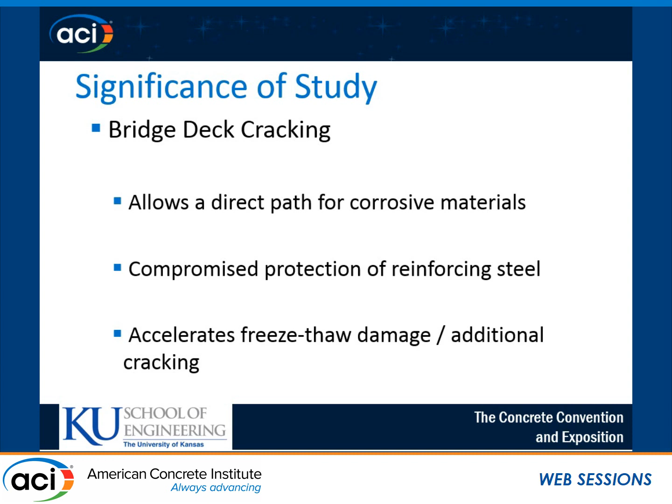The main culprits of cracking that we deal with in our research occur in both the plastic and hardened state of concrete. So we have plastic shrinkage and settlement in the plastic state, and after the concrete hardens, we deal with drying and thermal mechanisms.

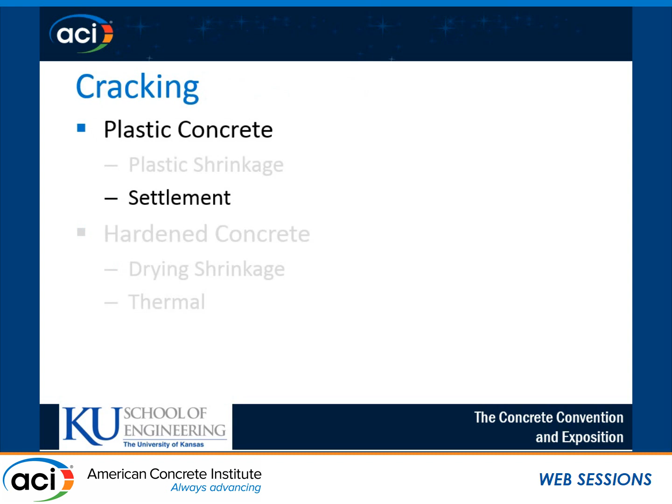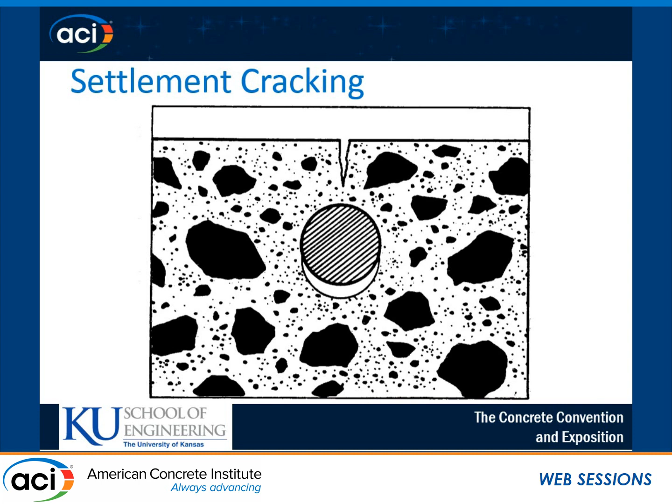The mechanism of settlement cracking is that the solid particles in the mixture settle down to the bottom, while bleed water rises to the top. As that concrete hardens, you have local tensile stresses that develop at the top, making you more prone to cracking directly over those bars. Not a good thing.

So, factors that affect settlement cracking: there's a lot of previous research showing that increased slump for a given mixture can also increase settlement cracking. On the design side, we can help mitigate settlement cracking by increasing concrete cover and decreasing bar size, with detrimental effects occurring vice versa.

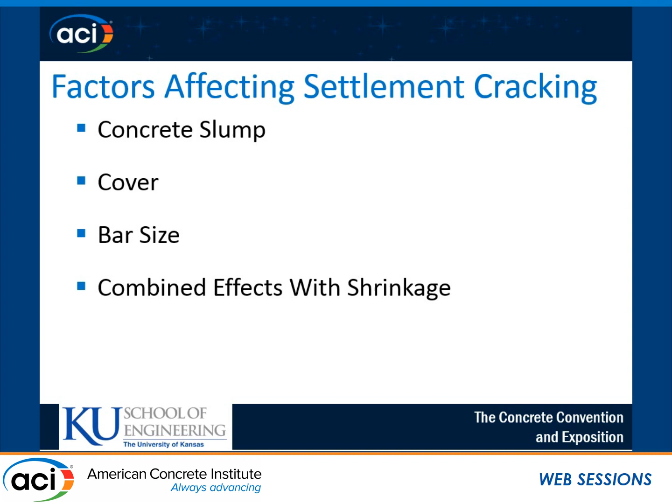Bigger bars mean a bigger surface area for that concrete to flow over, and less cover makes it more likely that concrete is going to crack. Finally, on the research side, we're tying settlement cracking in with shrinkage of concrete. Spoiler alert: the main point of this presentation is to show that many of the crack reduction technologies available to help reduce shrinkage also reduce settlement cracking.

Now getting into the laboratory side of things. This is a test, again, that we developed at KU to qualitatively compare different crack reduction technologies against a 100% Portland cement mixture in terms of settlement cracking performance.

The geometry of these specimens: we cast 12-inch by 12-inch by 8-inch deep beams with a single number 6 bar with 1 1/8 inch of cover over the top. After casting, we place these specimens in an environmentally controlled room for 1 day of curing, at 50% plus or minus 5% humidity, and 73 plus or minus 3 degrees Fahrenheit.

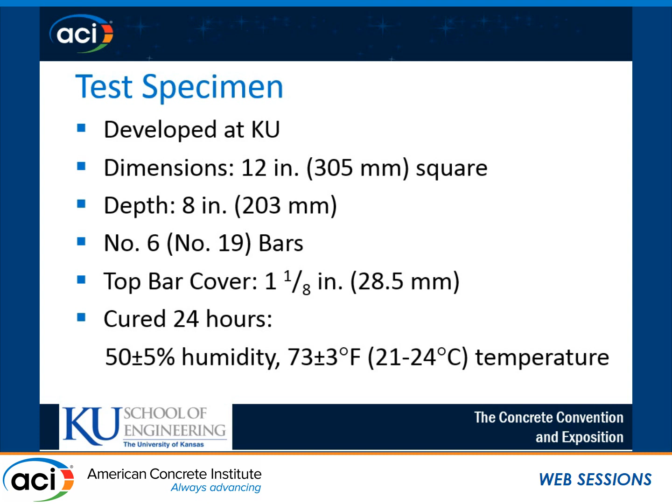Here we have a diagram of our settlement cracking specimens. To hold the rebar in place, we drill and tap both ends of the bar and hold it in place in the mold with a machine screw.

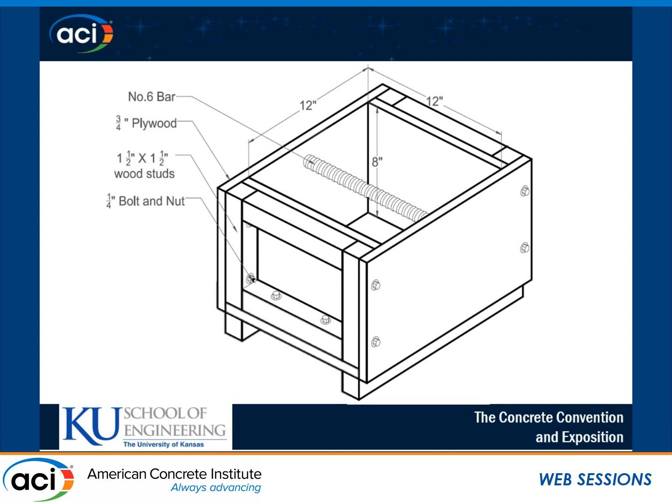For the properties we're looking for in our concrete mixes before casting specimens, we want an air content between 6.5% and 9.5%, concrete temperature between 71 and 75 degrees Fahrenheit, and our independent variable in these studies is slump. Most of our series vary the slump between 2 and 9 inches.

This gets into probably the most important part for maintaining control and getting good data: when we do a series, it's best to use a single operator for placing, finishing, curing, and doing the subsequent evaluation of each of these mixes.

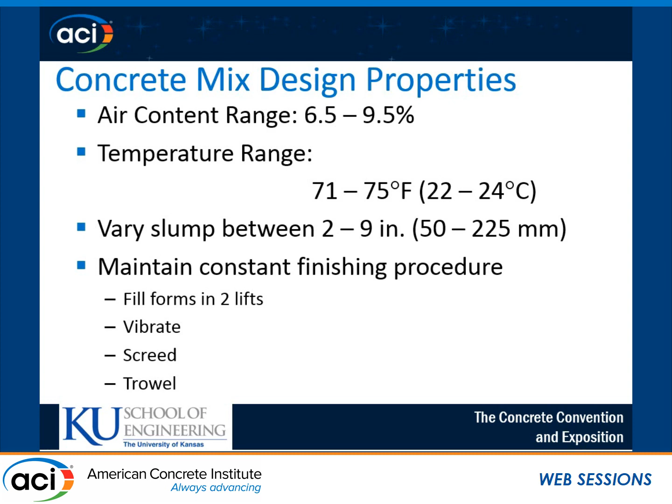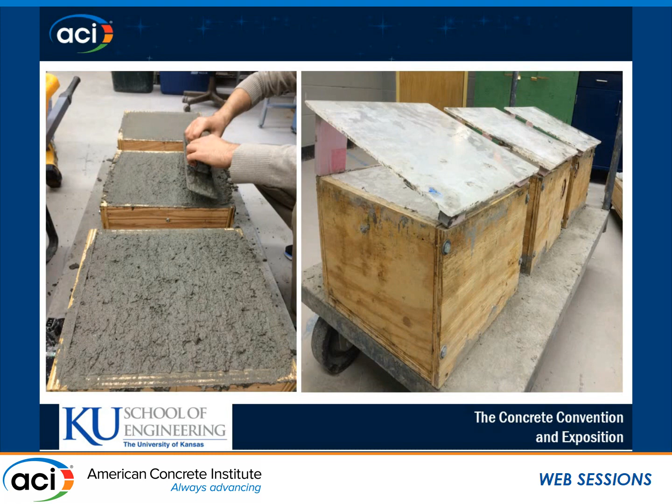The figure on the right is part of our curing regime, which was really important in the evolution of this test procedure. After finishing the surface of these specimens, we place a sloped piece of plexiglass over the top. This helps mitigate other factors that can come into play in the first 24 hours that can cause cracking, so we isolate settlement cracking by itself without drying shrinkage or other surface defect issues coming into play.

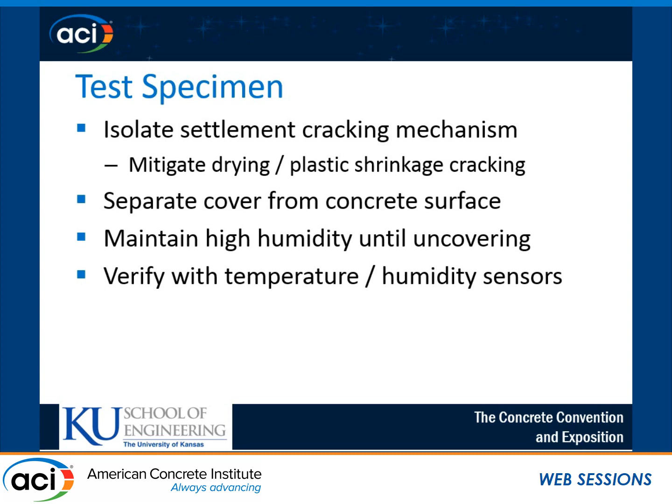We also want to maintain high humidity during curing, which we verify with temperature and humidity sensors placed on the forms, monitored throughout the curing period. After placing the sloped plexiglass on top of the forms, we seal those with a plastic sheet and seal that off with a rubber band.

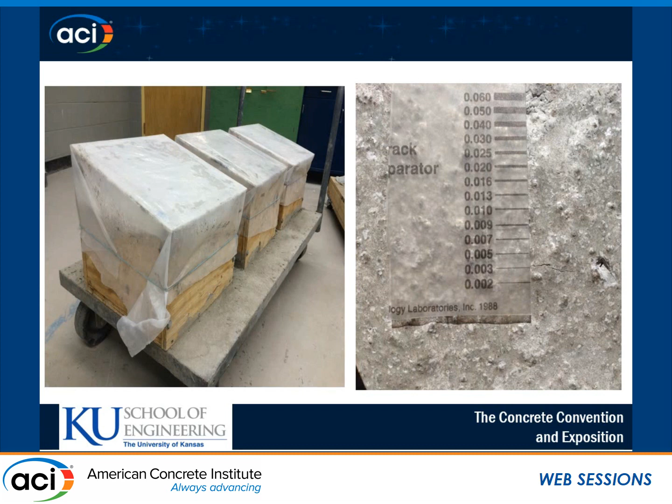Not very complicated. After 24 hours, we measure both the length and width of each resultant crack. Here's the finished product. It's also important to note that the only cracks we're actually counting are the ones that develop directly over the surface of that piece of rebar.

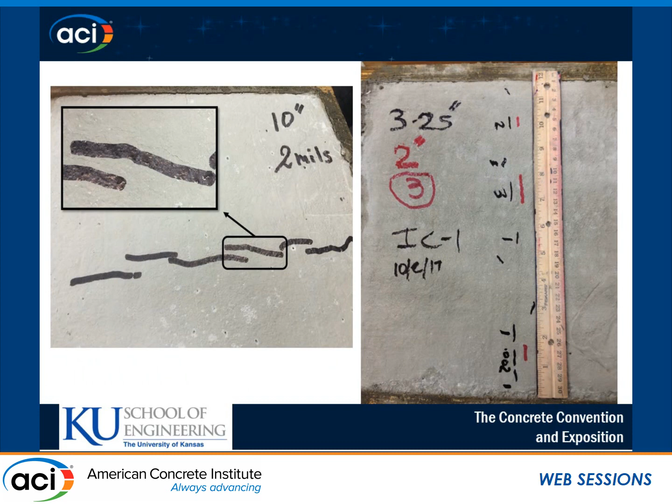Mixture proportions we kept constant for each series: a 0.45 water to cementitious materials ratio. We use 27% paste content, and for our 100% Portland mixes, which is our control series, that converts to 593 pounds of cement and 267 pounds of water.

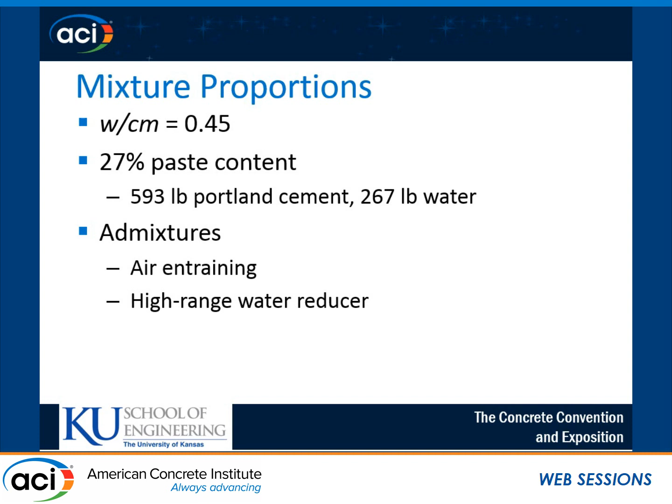To get our air correct, we use an air entraining admixture, and to vary the slump, we use a superplasticizer. With our control mix, along with others, we use KU Mix, a mix design optimization program. The aggregates we use are 2 gradations of granite, one with a 3/4 inch max size down to 1/2 inch, and the other 3/8 down to number 8.

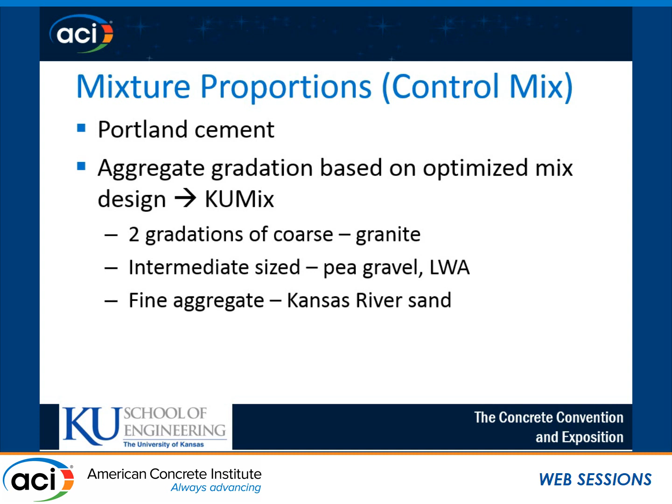We also use an intermediate size aggregate in the form of pea gravel. For mixtures where we want to incorporate internal curing, we use a pre-wetted pea gravel size lightweight aggregate, and Kansas River sand for our fine aggregate.

For our test program compared to our control mixes, we're looking at a partial replacement of cement with supplementary cementitious materials. Our binary mixes are 30% slag by volume, and our ternary mixes are 30% slag and 3% silica fume.

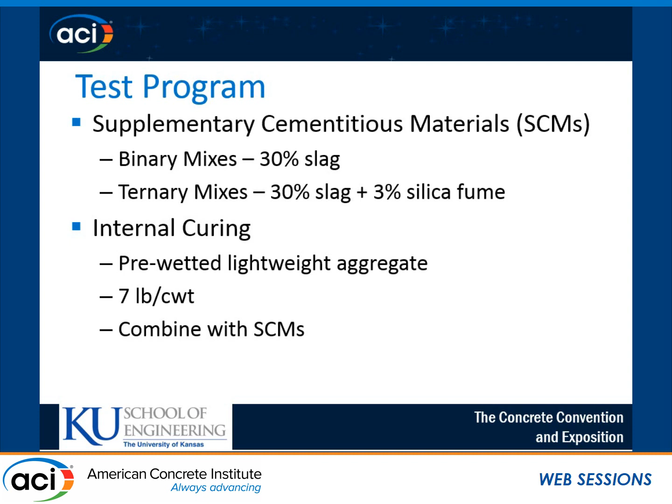We also introduced internal curing, again with a pre-wetted pea gravel size lightweight aggregate, proportioned to achieve 7 pounds per 100 pounds of cementitious material of internal curing water. We repeat those SCM mixes with internal curing to see if we can get a combined effect. And we do.

Additionally, other parameters we looked at were incorporating a viscosity-modifying admixture and a shrinkage-reducing admixture. We also looked at 3 different types of macrofibers and 1 type of microfiber for which we varied the dosage.

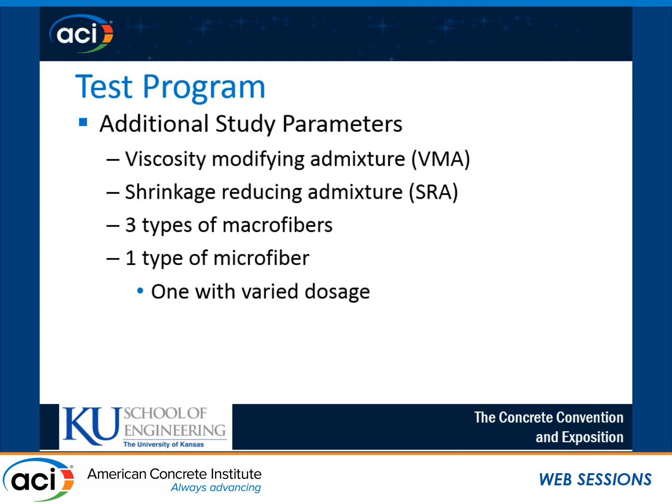Now getting into the results. Here's an example of one of our control series. For each of these graphs, we have slump on the x-axis and the ratio of crack length to bar length on the y-axis. So if each specimen in a single mixture had a crack 12 inches long over the entire length of the bar, that ratio would be 1.0.

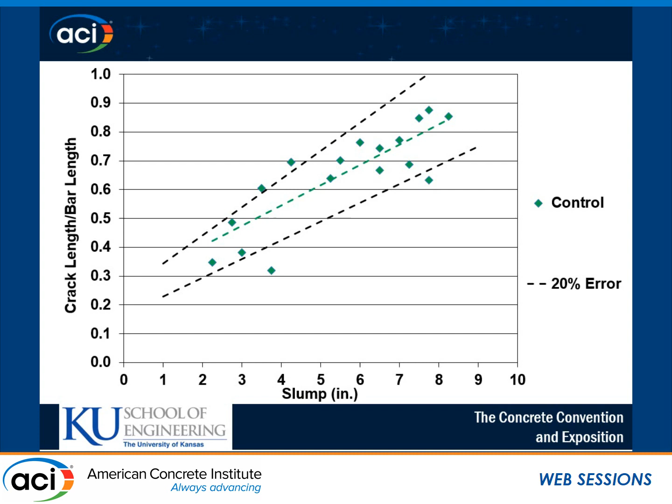Each data point here is the average of 3 specimens we do per mixture. This is important because we get a lot of scatter with these series, so we make sure we do enough mixtures to get a good trend line out of that.

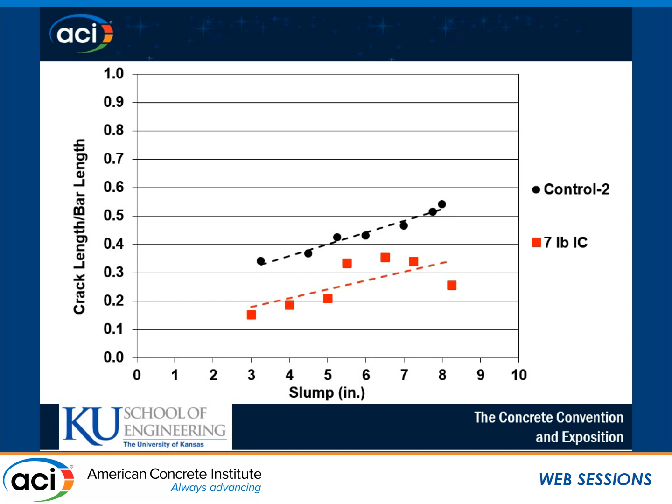Getting into our comparisons now, both of these mixes are 100% Portland cement, but the series in red has that partial replacement of lightweight aggregate pre-wetted to provide 7 pounds per hundredweight of IC water. For each slump we looked at, we saw a reduction in settlement cracking. The mechanism behind that is that the bleed water rising up in the system can be pulled out of those lightweight aggregate pores a lot easier than from the cement matrix, so the bleed water that comes out isn't being taken from the cement at all.

We see a similar trend with our binary mix. When we have our 30% slag mixture, we also see a reduction in settlement cracking. The mechanism behind that is that you're tying up more of that bleed water in the finer granules of that SCM.

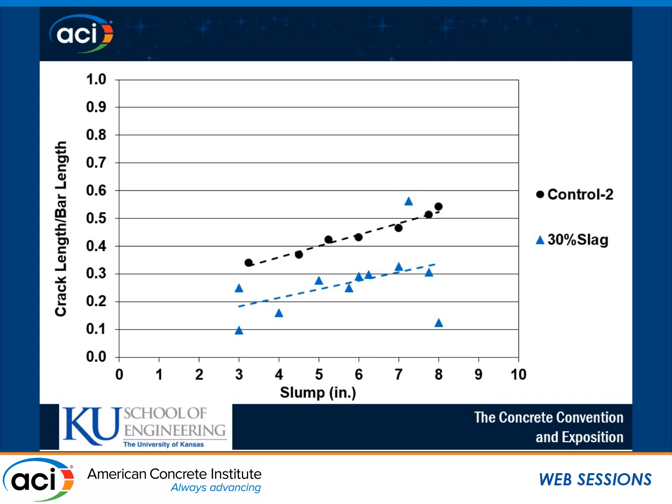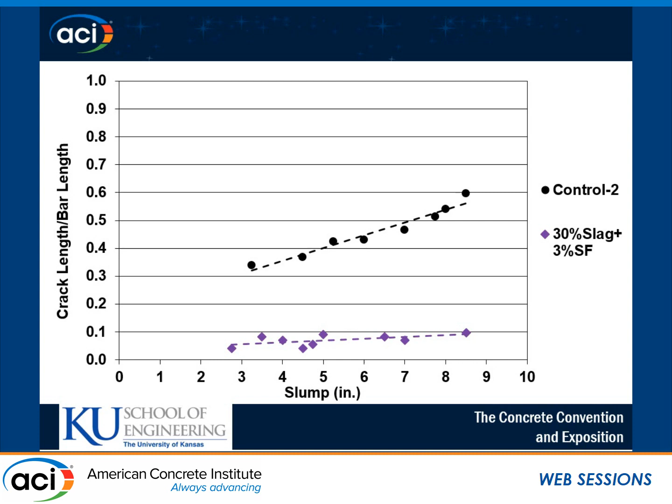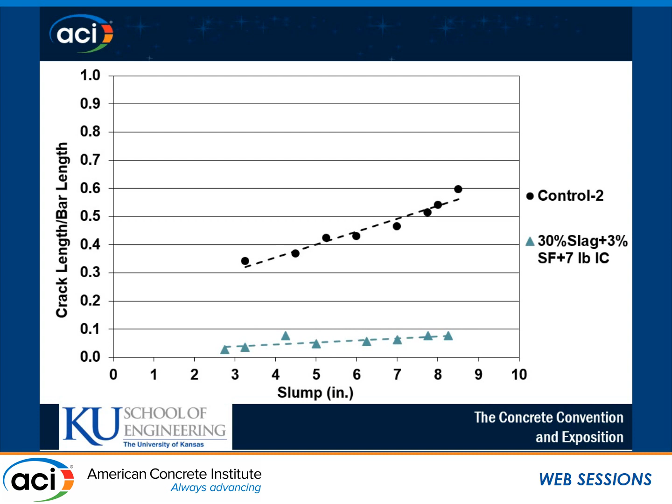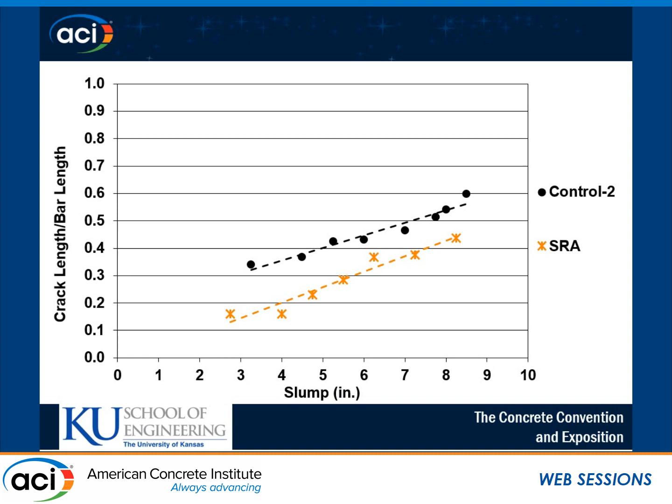And finally, when we add 7 pounds per hundredweight to our ternary mixture, we also have a very low resultant settlement cracking result. For that same control, when we dosed a shrinkage-reducing admixture at 2% of cementitious materials by weight, for 100% Portland cement, we also see a reduction in settlement cracking. This is likely due to, at early ages, SRAs causing swelling in the first 24 hours.

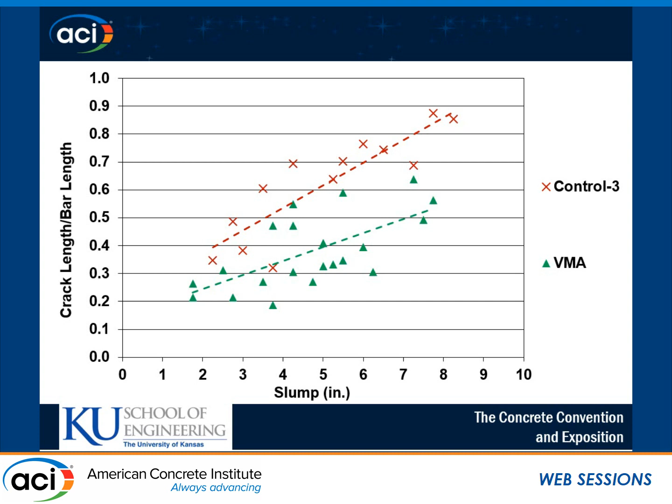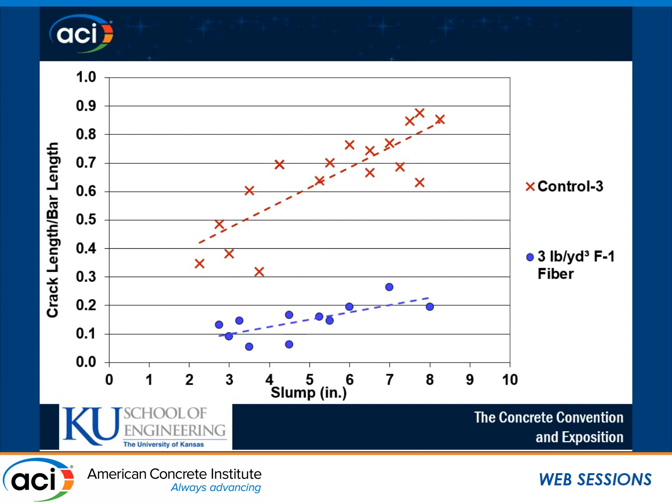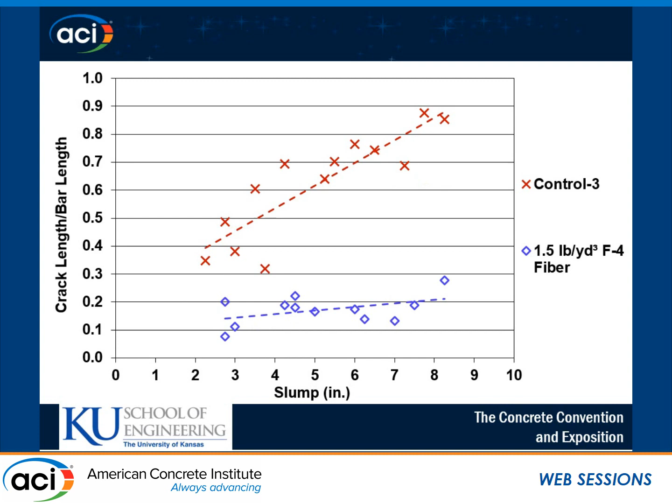Getting into our fibers, when we dosed 3 pounds per cubic yard with one of our macrofibers, for each given slump that we looked at, we had a reduction in settlement cracking. Very similar results when we used 1.5 pounds per yard of microfiber. When we group all of our fiber results together, we see a very tight spread of data for each type and each dosage. I'll point out that the 3 pounds and 1.5 pounds of microfiber per yard have almost the same result - the differences are not statistically significant.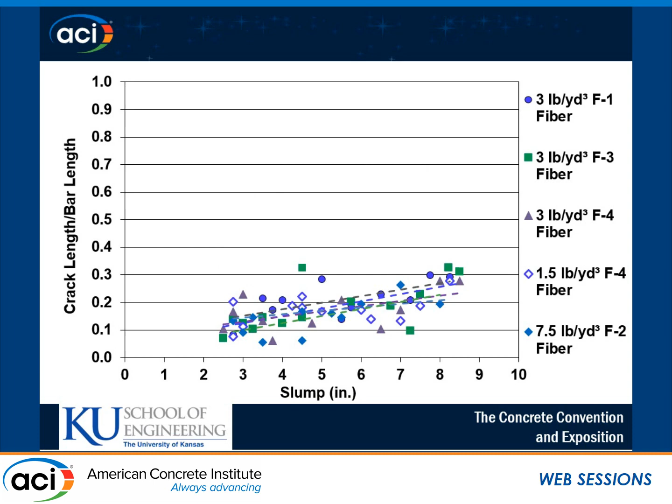Wrapping up, we've shown that settlement cracking does increase with slump, and that for the fiber series we looked at, the dosage rate doesn't necessarily change the behavior of settlement cracking, at least for the series we investigated. We do have combined effects with SCMs and internal curing. The most important takeaway for this presentation is that many of the technologies available to help reduce shrinkage in concrete mixtures can also reduce settlement cracking.

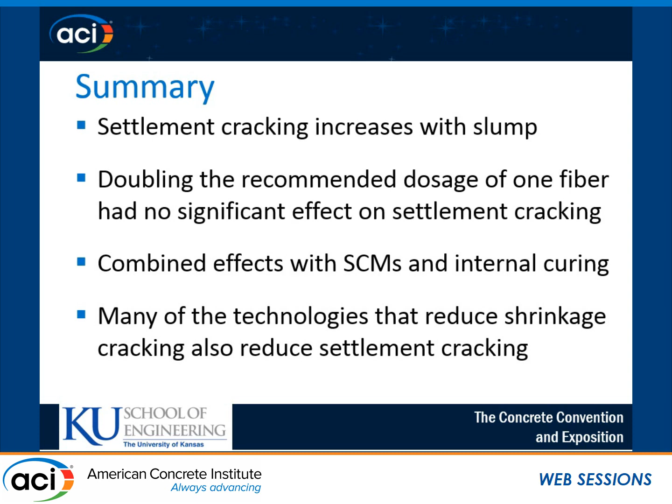Two questions. First, maybe you said so - did you say how you adjusted your slump? Was it by changing your water, or was it by changing your water-reducing admixture? We varied superplasticizer dosage to change slump.

Okay, and then the second question - you said you only documented, or only counted cracking that occurred over the bar in your test specimens? Right. Did you either verify that no other cracks formed elsewhere, or did you measure and document those so that you could calibrate your results to make sure you were making a finer adjustment? Yes, for a finer adjustment, if it's directly above the rebar or just adjacent to it, we took the cosine of the angle we estimate to get a more accurate reading. But for the most part, with our curing regime, we're able to isolate virtually all of that cracking to be settlement cracking directly over that rebar. So you just didn't have other cracks elsewhere in the specimens? Right. Substantially, yes.

Great work, thank you, especially for those of us in the trenches. That's terrific and well presented.